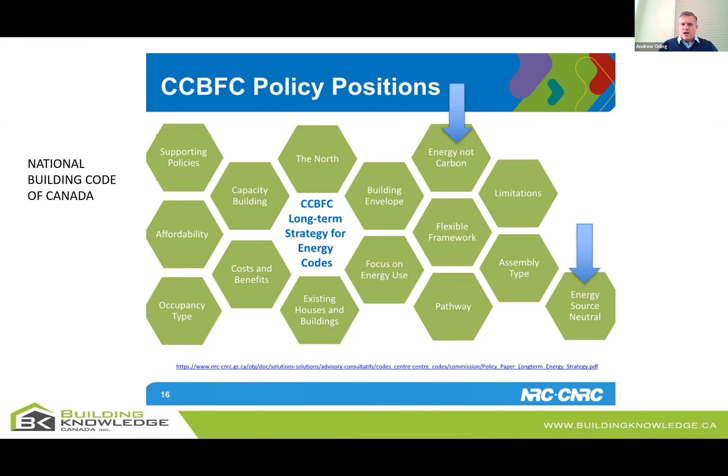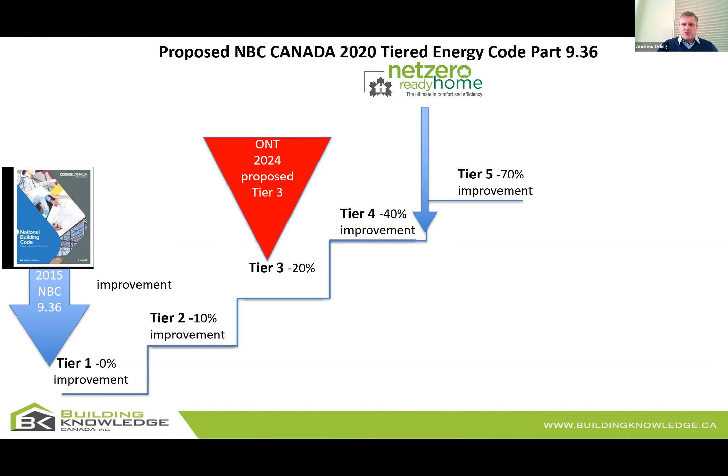So let's be really clear, because sometimes, in order to understand the development of a code, we have to understand the principal directions behind it. So this was for the 2020. Now, the question is, of course, with this tiered code, and of course, Ontario is sitting at about tier 3. We've heard, you know, Alberta might be tier 1 or tier 2. It depends on where the provinces want to land, but somewhere on these tiers. The real question is what impact does this energy code have on embodied carbon and on carbon in general? So that's sort of a question we need to ask ourselves.

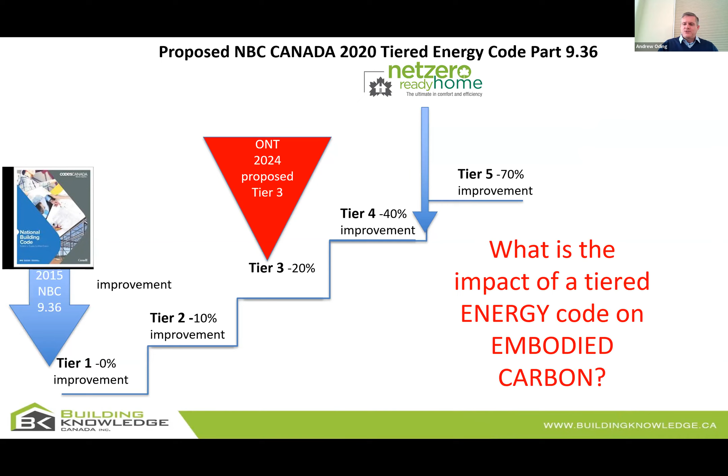One of the things that I think we do sort of know, and again, this is just our opinion from information we've gathered notionally, is the national building codes of 2020 and into 2025 will continue to deal with energy reduction only. When we get into 2025, you're going to see the release of alterations to existing homes and buildings around energy, but you might also see, who knows, a little bit of operational carbon.

In some of the future development code cycles, there is already some discussion and there's some work being done, I believe, on the policy side around resiliency. And really, the point we want to make with this slide is this really is lockstep with what we're seeing south of the border, and not just starting, but what we've seen for a number of years in other countries as well.

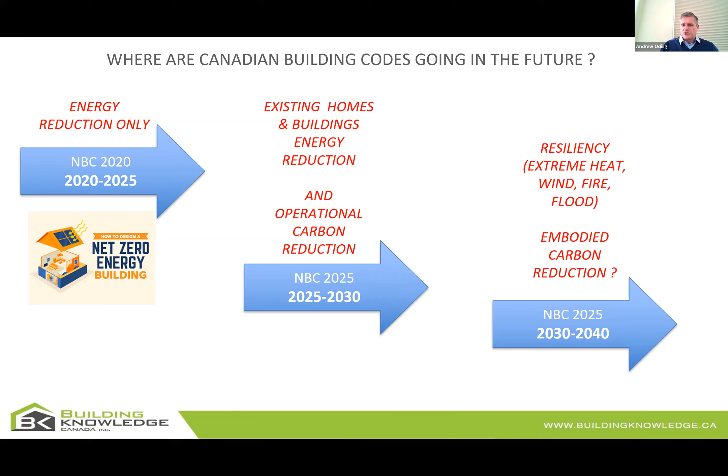It's interesting, if you do look south of the border, underway is the 2024 IECC, and that is the residential code for houses and small buildings. And what's fascinating about it is buried in that energy code, they do start to talk about lowering carbon. There is discussion in that code about using things like even renewables to offset a certain percentage of energy. So they're starting to move beyond that, and I think we'll start to see some similar trends here.

Of course, I'm going to show you a couple slides that have been a little bit informative. To some, they have been startling, but they have caused us to rethink our focus on energy and carbon. And of course, a lot of the work has been done by Chris Magwood and a number of others. This is an older slide, 2018 or so, from Architecture 2030, that pointed out very early that the concern isn't just energy, it's also carbon. That's really the big one when it comes to climate change.

And what they noted was that the operational carbon, we can sort of understand, that's the carbon that's emitted from the operation of the building and the home, but the carbon that's actually from the manufacturing side and the installation, wow, that's almost half the carbon output. So this is sort of important to understand.

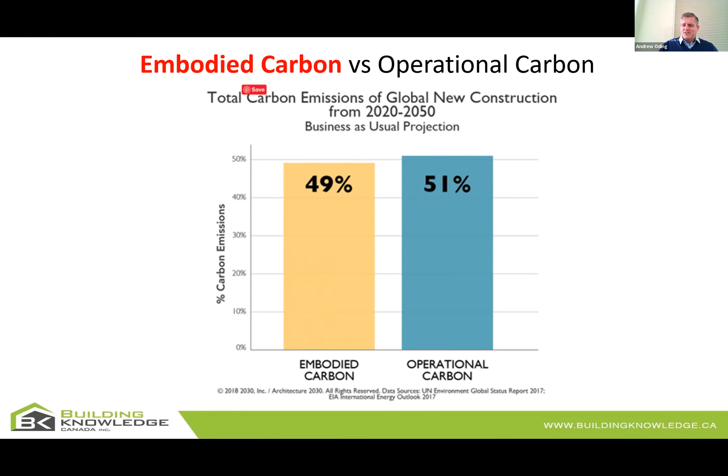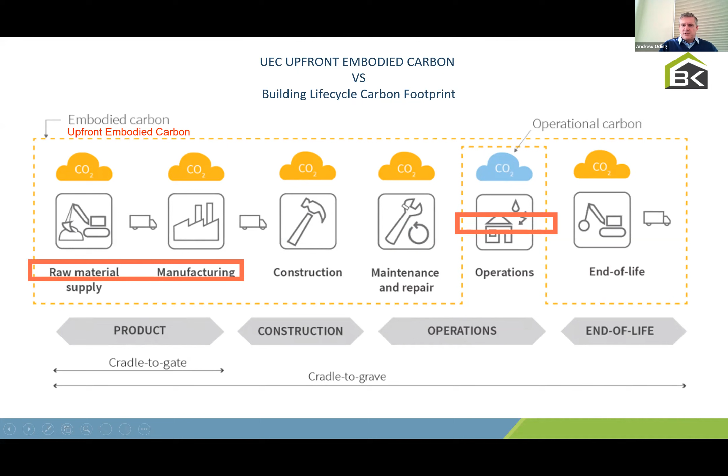So just to be really clear today, when we do use terms like embodied carbon or operational carbon, this is where they sit in the full life cycle assessment. We're not talking about all of the points of life cycle assessment for carbon emissions. We're talking about really two or three of the most important. So embodied carbon, or upfront embodied carbon, cradle to gate, is that raw material to manufacturing, something that you could get on an EPD that could be easily used in reference. And then of course, operational carbon that comes from the home.

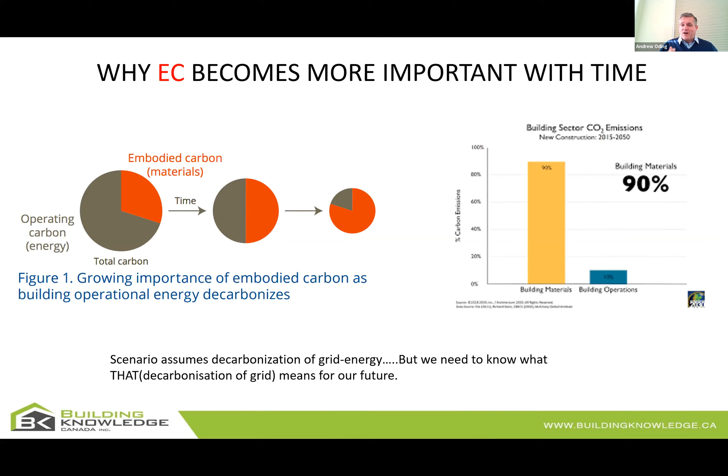One of the points that's made by Chris Magwood, Builders for Climate Action, and even Natural Resources Canada, is that as we reduce the energy use in the home in the tiered code and we reduce operating carbon, the embodied carbon becomes more and more important. And that's going to be as soon as 5 to 10 years out. It's going to become the biggest part of the pie for us to solve. So we need to start to develop tools.

Now, this was not a blanket statement. This was simply an observation, and this was based on some pretty dramatic assumptions, but it is good to keep it in our headlights.

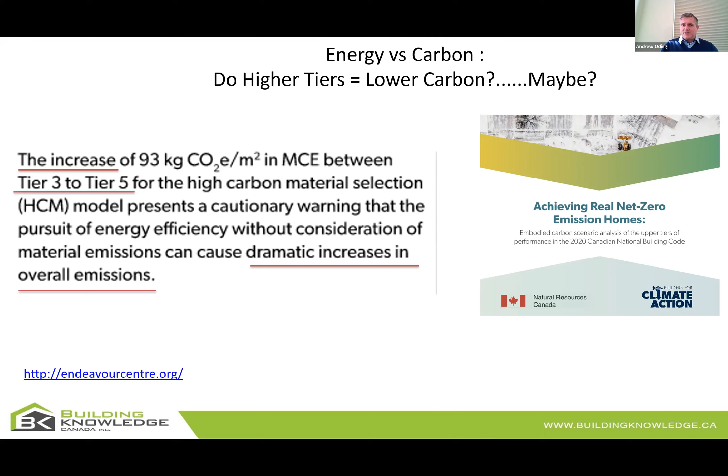The tool, I do want to bring this out. There's a training session coming up at EnerQuality over the next week or two, and it's training around the use of what's called the Material Carbon Emissions Tool. It's been developed by the LEAP team, Natural Resources Canada, the Endeavour Centre, Builders for Climate Action, and CanMet. All these folks are involved in developing this tool. And I wanted to give you a snapshot of what this tool is, because you're going to learn more about it in the future.

And the reason it's important, again, for our talk today is because we really are focusing in on that Part 9 low-rise residential stock in Canada. The Material Carbon Emissions Estimator tool, again, some of these tools are courtesy of the LEAP and NRCan and the team that's developing the MCE training. It is an Excel-based tool. It can be used by energy advisors and other professionals.

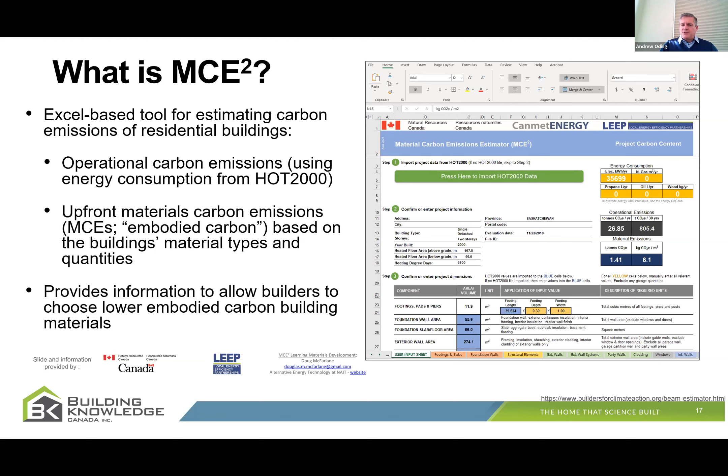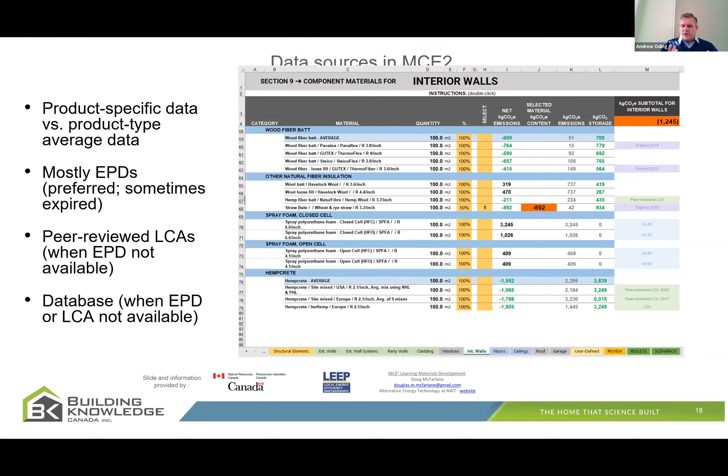It bolts onto the energy model and starts to give a sense of not only operational carbon, but embodied carbon. It applies everything from environmental product declarations from certain materials. In the lack of a material, it'll provide industry averages. So again, you can learn more about this in the course that will be at EnerQuality shortly. I did want to show you some of the results though that come out of this tool.

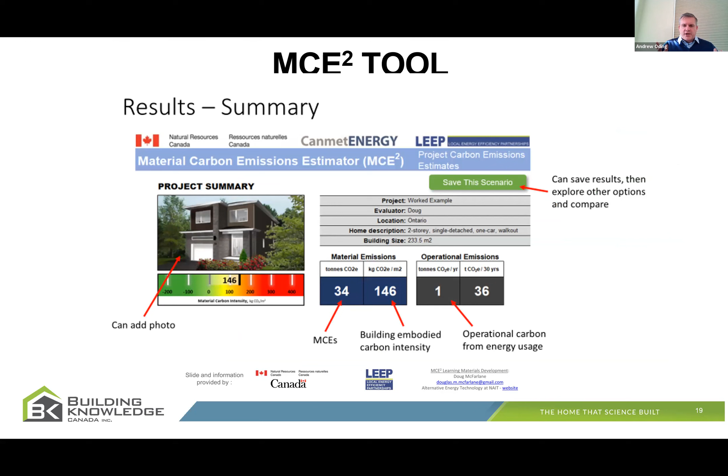We took a simple home actually that was built in Ontario, and we did an analysis. I want to show you quickly what it does. So here was the home, climate zone 6. So it's up on Georgian Bay, and we found out that using the MCE tool in HOT2000, this home had operational carbon over 30 years of about 100 tons. And the material carbon was about 55 to 60 tons of that. So the total carbon use intensity, if you will, over 30 years was a total of 157.

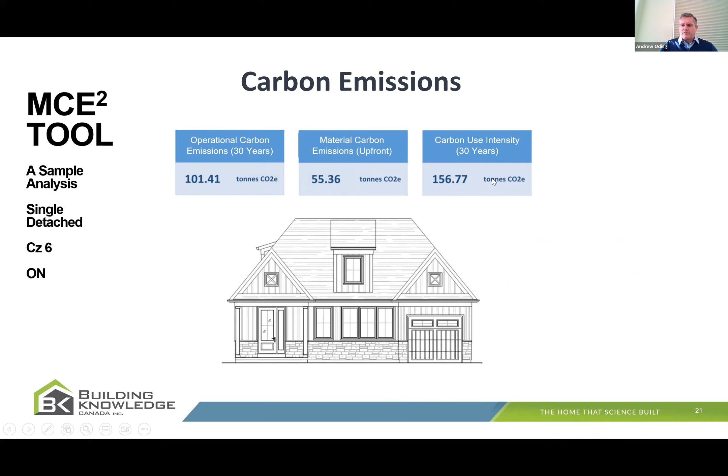What's interesting is with this tool, you can actually do a comparison. So on the left, this was the home as it was built. And we applied a little better insulation materials. In other words, we took a typical old traditional XPS insulation and applied the new low carbon NGX board. We applied things like an air source heat pump, a little bit of air tightness. We applied a different cladding, and we were able to take it to the results on the right and actually had an overall carbon emissions reduction of 52%.

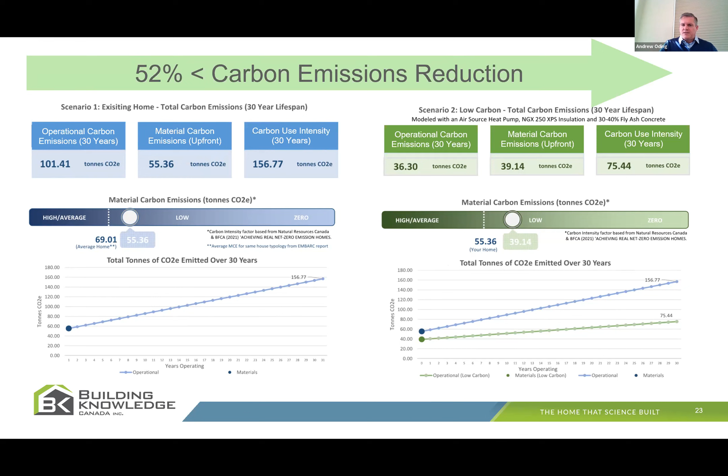And again, some of these could be considered fairly aggressive by some, but really these are sort of readily accessible solutions for homes today. So a big difference both on the embodied and upfront, and of course the long term as well. What were some of the big hitters on this house?

Well, if you could move to a carbon smart insulation, and again, very general term, what that means is maybe you'd move from an XPS to maybe a new XPS that has a better blowing agent. And again, we're seeing that with all types of foam boards. You could consider even fiber-based materials as well, cellulose or glass, either one. But again, we'd advise go back to EPDs, have a look at them.

Concrete, of course, everyone's on concrete. Like, we got to do something to concrete. And it's true. In this house anyways, if you change that concrete mixture a little bit, you could have the second biggest impact. And then the bottom one was they actually were using a fiber cement board siding on a lot of their homes. And we found that if you look at a little lower carbon fiber cement board siding, something that's newer to the market coming up from the manufacturers, they could then make a difference.

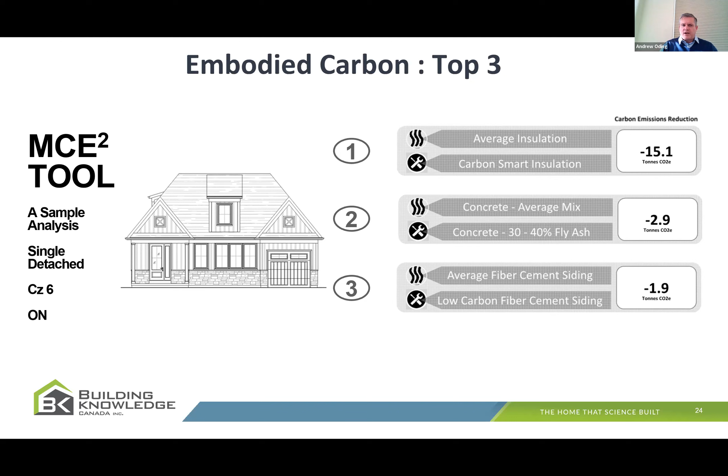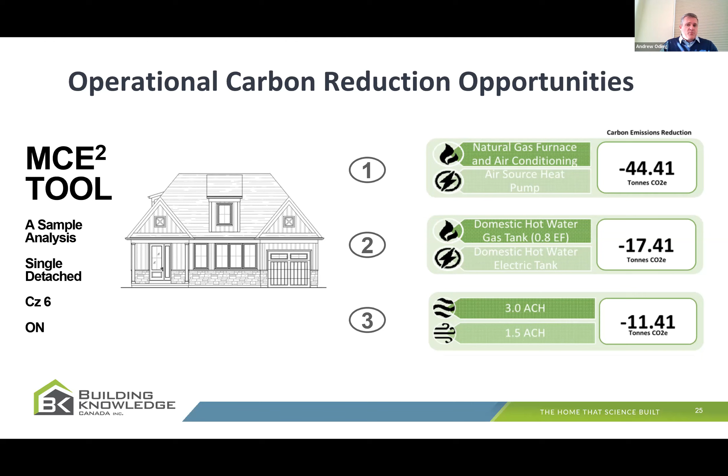Or a simple measure like air tightness, 11 tons, just because you made the home a little tighter. So the point we want to make here is that over the next couple of years, the exercise is going to be about benchmarking where we are today, and then what are the low-hanging fruit that we can do to make a reasonable improvement. And just by showing these simple measures, we could hit a 50% reduction in the total carbon emissions.

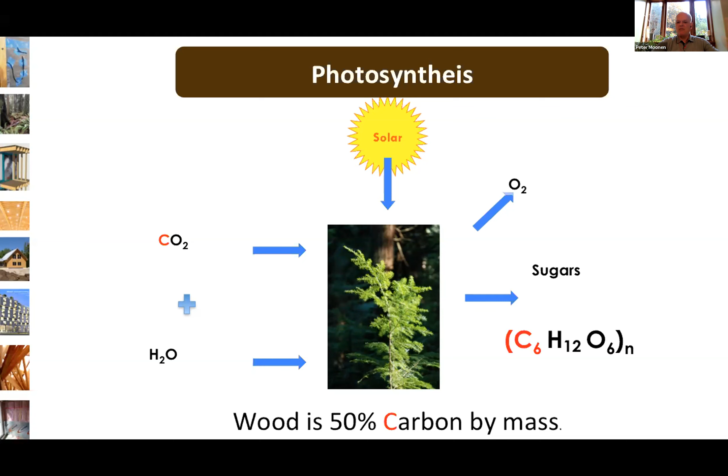A lot of discussions are around what we should do in the forest. Should we just leave it? Well, part of it's going to burn. Should we cut it down and plant fast growing trees? Natural Resources Canada has developed a carbon budget model for the Canadian forest sector. This includes all forests, not just forest that is harvested or managed. And you can have carbon reduction or carbon mitigation by harvesting less, longer lived wood products and better utilization, or a mix of all three.

What they found is that if we just focus on a single solution, we're not going to optimize what we're trying to achieve. If you're interested, it's a parametric model developed by Dr. Werner Kurtz, who has been on the IPCC for many years. He's recognized as a leader on land-based emissions, which includes agriculture. So we have to look at forest management in multiple ways, because how we manage this forest is going to be different than that forest.

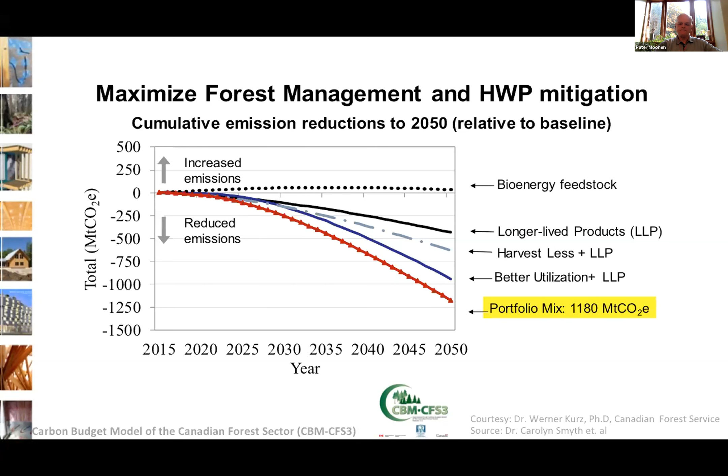Where I live, I have a forest that's about 130 years of age, and it has an average annual uptake of about 35 metric tons of CO2 equivalent every year. Older forests may have more mass of carbon, but it will be in much fewer trees, and that forest will generally be in a stasis where it's not absorbing any more carbon because the dying trees are also emitting carbon.

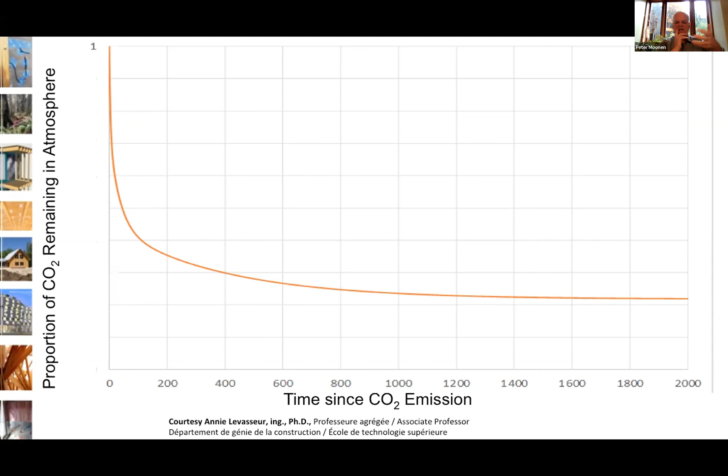Typically, when you're dealing with wood, you're dealing with what's called a biogenic product. It comes from nature and it will go back to nature. In 2 years, 200 years, 2,000 years, it will go back to nature. But that's a cyclical event using atmospheric carbon versus fossil carbon, which was atmospheric carbon 250 million years ago and is locked up. So with this half-life, what we're doing is we're delaying the emission of the CO2 by storing it in a wood product. And that radiative forcing is what we're trying to avoid.

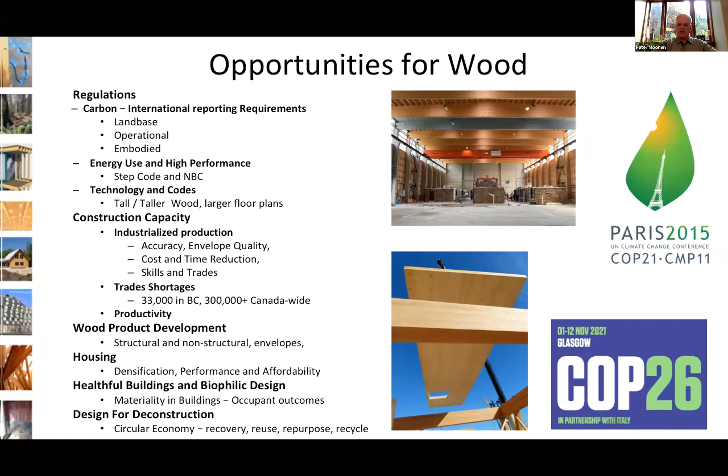And when you look at what's happening around the world in the construction sector, you've got regulations, international regulations on carbon, whether it's land-based or operational or embodied. You've got energy use and performance guidelines. We have changes in technology. The construction sector is facing all sorts of opportunities and issues. I'm going to go through a few of these with an eye to how wood can contribute to what this issue has created.

So we talked about the IPCC and Werner Kurtz and the carbon modeling, carbon budget modeling. This is the forest I live beside in British Columbia. And the emissions from the land base are now required to be reported to the IPCC. And that includes agricultural. It also includes all of the emissions that come from forest management and from the forest land base itself, whether it's from fire, bugs, or harvesting. So those are regulations that we have to report.

Those are agreements. But the forest will sometimes release more carbon or it will store more carbon, depending on the fire season for the most part. If we have ways of reducing or capturing that carbon, we're actually contributing to mitigation.

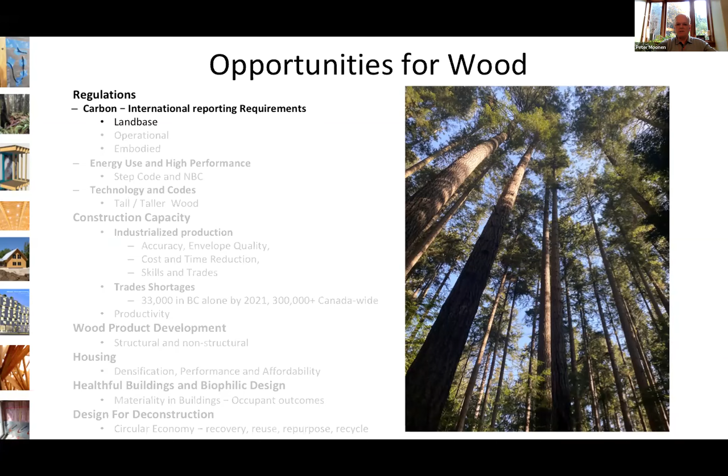I'm glad you had some of those photos earlier and some of the discussions from Chris Magwood, because embodied carbon is important. This is a life cycle analysis that was done for a building in Australia. And as you'll notice, the embodied carbon is 35% over the life of the building. 23% is heating and air conditioning, which is the part that's regulated by our codes. So we put all of this effort into operational performance, but we're really only addressing about a quarter of the operational energy, because no one tells anybody how much hot water to use or how much refrigeration to use.

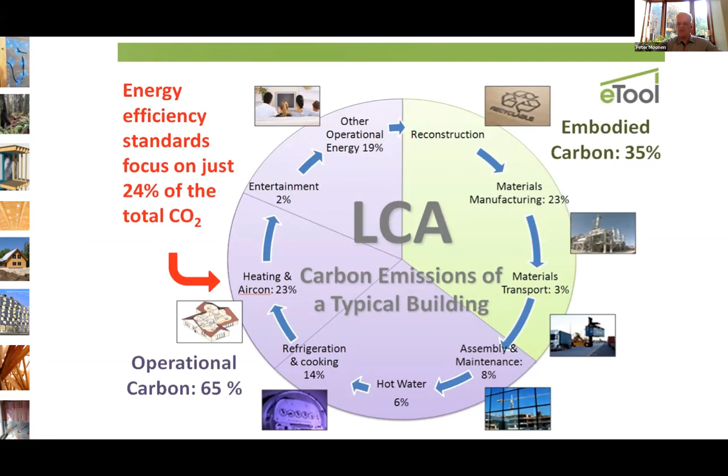So in this LCA, the embodied emissions of a regular building were 50% higher than the carbon emissions associated with that which is regulated. Wow. So Andrew, you mentioned that we're getting into carbon regulation. This may change. But we have to look. This is as it is now. So I talked about this forest product substitution, but didn't delete the slide.

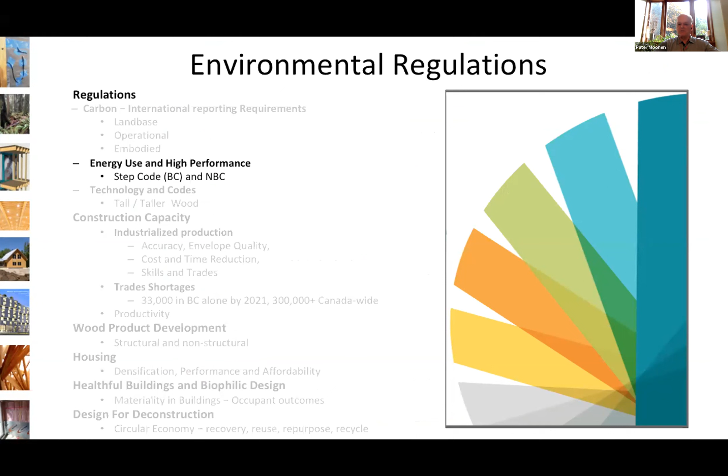So energy use and high performance. I don't think anyone's thinking that we're not going to have rigorous energy codes. They're not going to get simpler. These are opportunities for wood, partly because of wood's thermal capability, but also because of some of the technology that is able to be used.

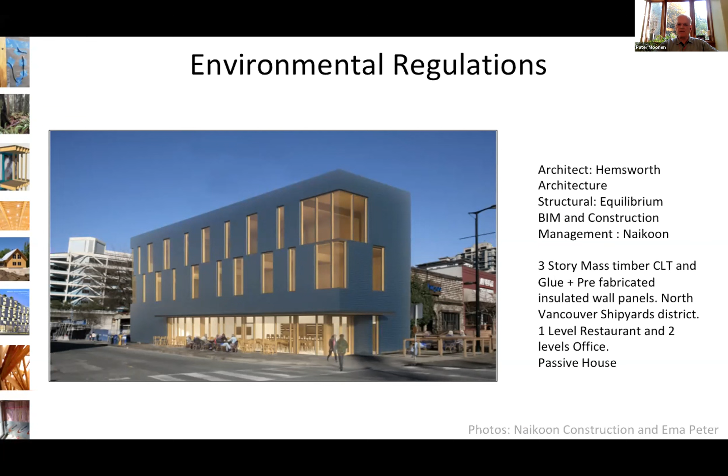Peter, it's interesting. This is Naikoon Contracting. That's Joe Galushan's team. I know. I know Joe well. Yeah. And so for a lot of the attendees, Joe has been part of the CHBA Net Zero Council for years. Yeah. Phenomenal builder member. That's great. No, that's very cool.

Thanks for that. So the thing about this one that drew my attention was not that it was passive house, not that it was mass timber, not that it was heavy timber, not that it has no parking, not that it has a CLT fire separation. It's because it has all of them in a building that made economic sense. Wow. So we can do this, and we don't have to say, oh gosh, it's going to be 30% more expensive. That's not true. And Joe has figured it out. He's done several buildings, and it's always a treat to get on some of his sites.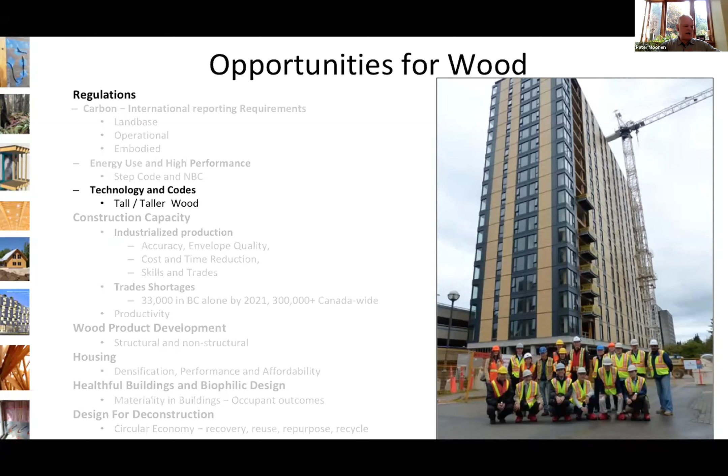And Andrew, you talked about Joe. They built that building virtually several times beforehand to figure out the best way. Yeah. They used, I think it was, CAD Makers' design. Every component was installed virtually. So another area where we have to focus is construction capacity. I don't think any builder is saying, oh yeah, I got lots of trades. No problem, I can get them anytime I want.

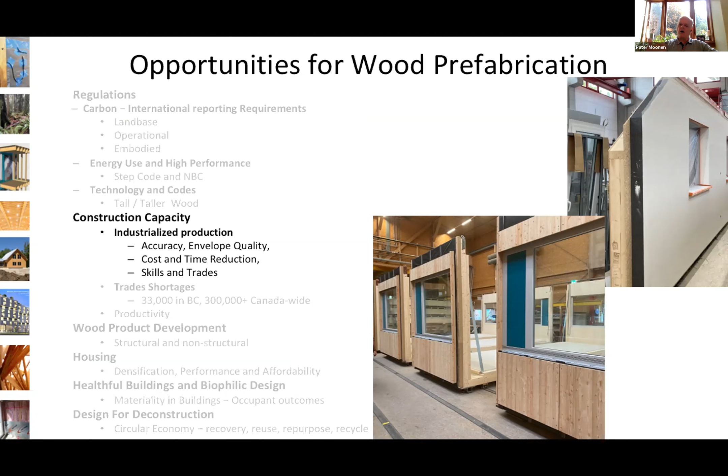But there's another aspect to industrialized production, and that's the accuracy, the consistency. The pictures here are from some companies that we saw in Europe last spring that fabricate modules, they fabricate panels, they build component sections or bathroom pods, that kind of thing. That industrialized production reduces the waste of materials, which always has a carbon impact, reduces the time, and consolidates where you have your skills and trades. So that's an opportunity for wood, and it's an opportunity for carbon, because this kind of construction provides a higher operational performance and a lower embodied impact because of the lack of waste.

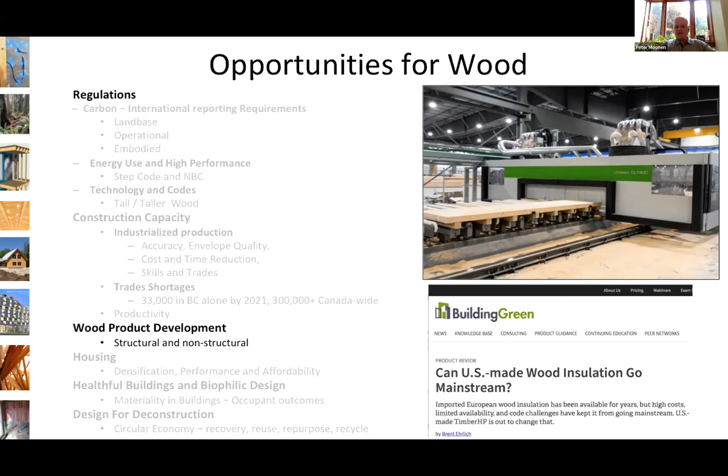Wood product development. There was an article just earlier this week that I read: Can US-made wood insulation go mainstream? It's a product that's been around in Europe for about 30 years. We don't make it in Canada yet. And Chris and I have talked about this, it has a very low embodied impact, and it has very, very good performance. It's about the same as XPS. But it's renewable, it's recyclable, it's reusable, unlike a lot of insulation, because it's screwed in place, not glued. And it's made with a residual material.

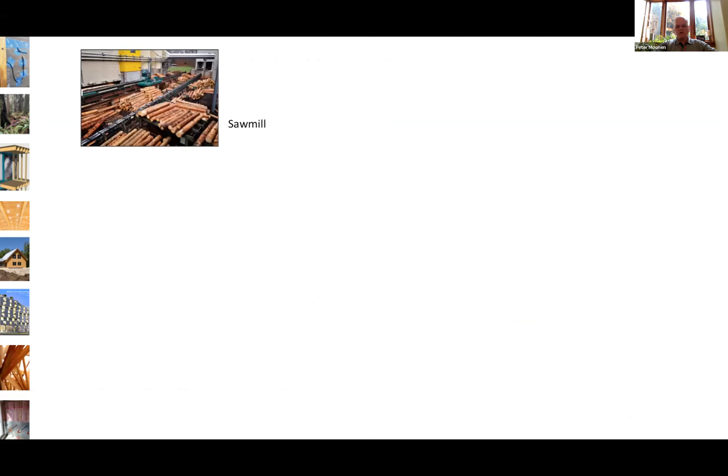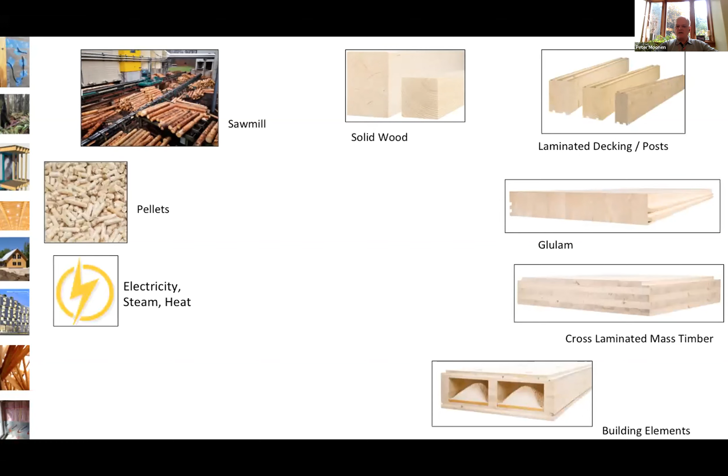There's a sawmill in Europe that burnt down in '74. The widow restored it. She makes lumber. She makes solid wood products. They make laminated decking and posts. They make glulam, cross-laminated timber, building components, pellets, energy, steam, refined fiber, and wood fiber insulation, all from this small 20-acre site that used to be the family farm in a small town in Germany. Wow. We can do that here.

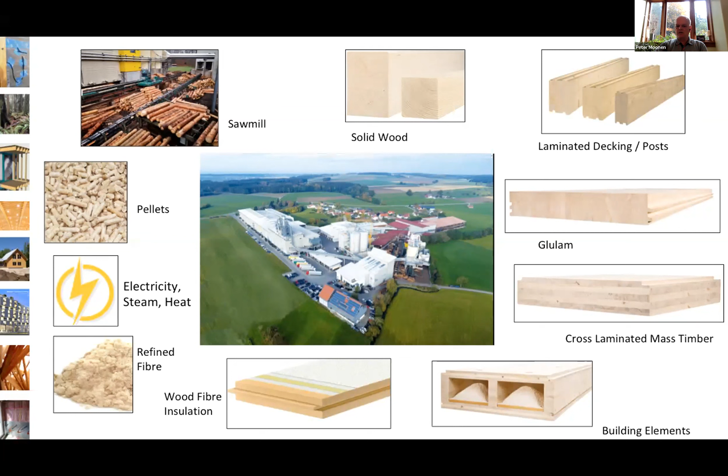We have to reconsider how we do things, but this is the kind of operational efficiency. At the end of the day, nothing gets wasted that goes into that mill. It goes in as logs, comes out as ash or a product. And I think they probably sell the ash. Mm-hmm. So this is optimizing the carbon that comes from our forests. And a lot of these are going into long-lived wood products, other than the pellets.

The other thing, I don't think there's a city in the country or in the world that isn't facing densification issues. And in Canada, at least in British Columbia and across our country, you can't just densify, you've also got to have performance. While at the same time, we're faced with who the heck can afford to live in these cities? Mhm. So how are we going to do that?

It's going to go back to things like addressing the productivity of our construction sector, using cost-effective materials that enable the performance of the building to improve and reduce the impact. And that's where wood can play a role.

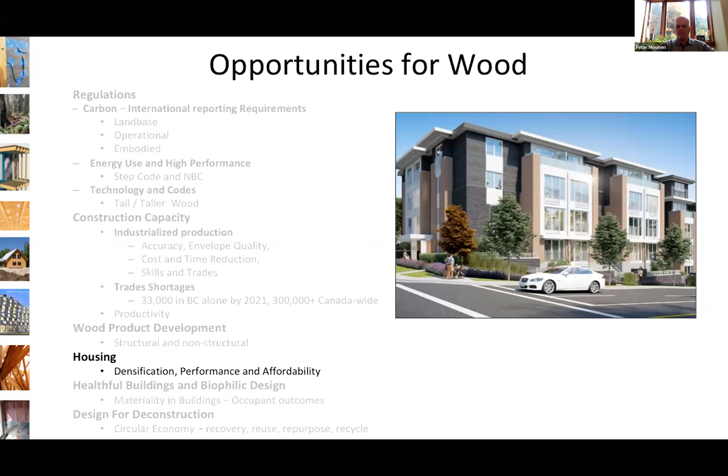The other things, some of the things which some of you as builders may have come across, is the biophilic aspect of buildings and the health of the buildings on the occupants. If you don't know Tye Farrow, please go to his website. It's called causehealth.org. I'll put it in the chat later. And he has just finished a master's of neuroscience in architecture. He's looking at the impact of the buildings on us. And he's examining things like acoustics, temperature, moisture, the whole, and what we see, whether it's conscious or subconscious.

So wood, other natural materials like stone, water, plants, sunlight, those have a positive effect by reducing our stress levels. And whether we're aware of it or not, we have stress wherever we are. There's good stress and there's bad stress. And if you think of a building, whether it's healthy or not, as sort of like driving a car uphill, but the car has no brakes. You're either going forward or you're going backward because there's no stasis. Buildings impact us, and we have to make them so that they impact us for the better.

Wood has been shown to reduce the stress level in both the sympathetic and parasympathetic nervous system. That could be a whole topic on its own, Peter? Yeah, it can. Yeah, it's a lot. We did a workshop on healthy buildings last spring.

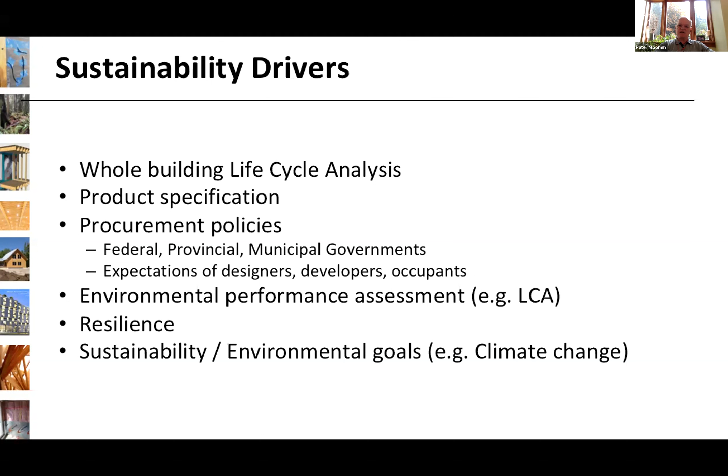Andrew, you talked about resilience, and everybody has sustainability goals. So these are some of the things that are driving our sector. And above all, materials matter and carbon matters. And as I said, there's procurement policies which are coming into place. For those of you who may not have done whole building life cycle analysis, I'd urge you to find someone who's familiar with that, whether that's in your design team, whether it's on staff, but pay attention to that because it not only helps you reduce environmental impact, it makes you more efficient. Right. The EPDs were started to reduce the impact, and that makes people more efficient.

And don't be afraid to collaborate. I know CHBA has lots of collaboration opportunities through some of the sessions they have, but we need to be cohesive on our objectives and have some common tools. That's right. So one of the tools that we're working on is a project of the National Research Council called Low Carbon Assets for Life Cycle Assessment. We call it the LCA squared. And it's part of the government greening their procurement strategy. And we are involved in gathering information from all of the producers of various wood products. So we're focusing on plywood, OSB, lumber, I-joists, and plate trusses.

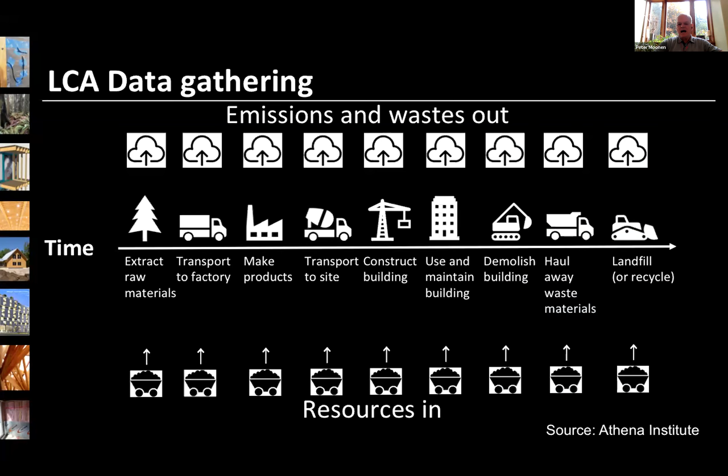You had a version of this drawing, Andrew. There's certain areas where a manufacturer has a role to play. So in this case, the Forest Products Association of Canada, that's a member-driven organization, they're responsible for the forest aspects, the transport to factory, and for the manufacture of the primary products. The Canadian Wood Council and the Woodworks program get involved in assisting designers and contractors to understand the appropriate use of wood. So we play in this area.

But at the end of the day, after the building has been torn down or removed in some way, what happens in this area? Landfill, the product stewardship. So it's an area that we are going to be doing some research on, not so much to reuse those products, because landfill occurs after all reuse, but to say, what is the impact of burning or landfilling an I-joist that has 3 resins? So we're going to be gathering information like that over time.

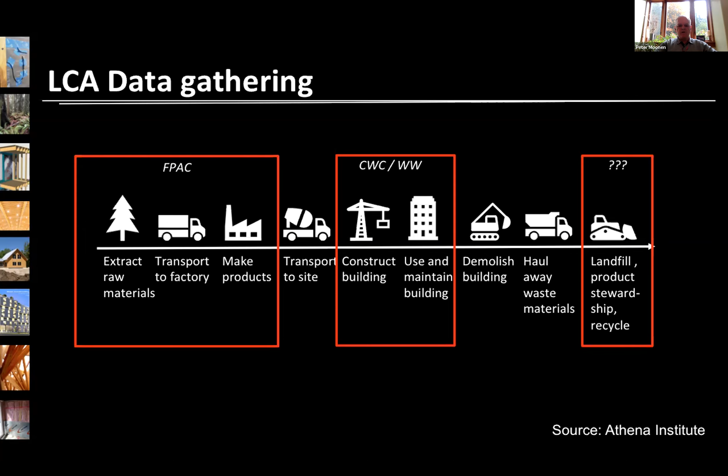But there is a really important role in designing buildings that don't have to be landfilled, that can be reused. And when I say reused, no one's going to take CLT and turn it back into a 2x6. How do we recapture the function? That's the circular economy. So when I get back to this slide here, and I say, if I was to invent this material, I'd be rich.

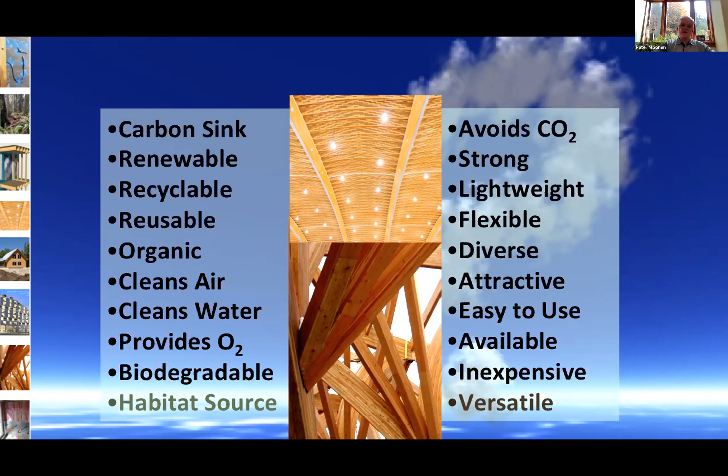But the question that we have to ask, and in the context of that, there is no perfect material. But if we're going to build, why should we use wood? So you think about all these attributes, all of which are important, and many of which we strive for in our designs. So perhaps the question shouldn't be, why should I build with wood? But if I'm not going to build with wood, what am I going to use that performs the same structural and comfort and aesthetic function and has as low a carbon footprint, where applicable, as wood?

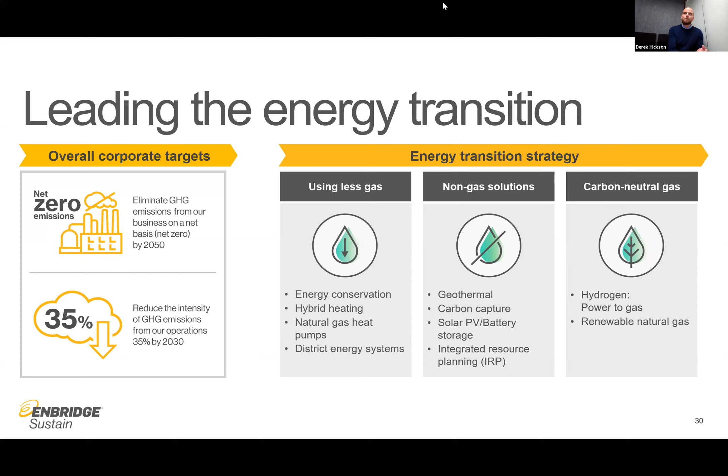So coming from the builder world, I can attest to these challenges faced by customers and builders. Obviously, as Andy's slide earlier alluded to, the codes are getting more and more stringent. Municipalities are taking on a more active role in specifying what targets we should be hitting, and customers are demanding more from their homes as well.

The challenges in just immediately going to a net zero future is, we have a high cost to adopt some of these technologies. It's certainly more expensive than conventional from a capital cost perspective. And we'll talk about the operating costs in a second. Builders and homeowners don't necessarily have the time to research the best choices, nor do they have the technical expertise. And then the last big piece is the technologies that are coming out are becoming a bit more sophisticated than a layperson may be comfortable with putting in their home.

So, I'll talk more specifically about the technologies we're looking at, but obvious items are things like geothermal, where the operations of them are paramount. Hybrid heating, where to really capture the benefits from them, you need some smart controls, and solar PV and those kind of things, where people's comfort with having them integrated in their house might not be there yet. And if you want to go to the next slide.

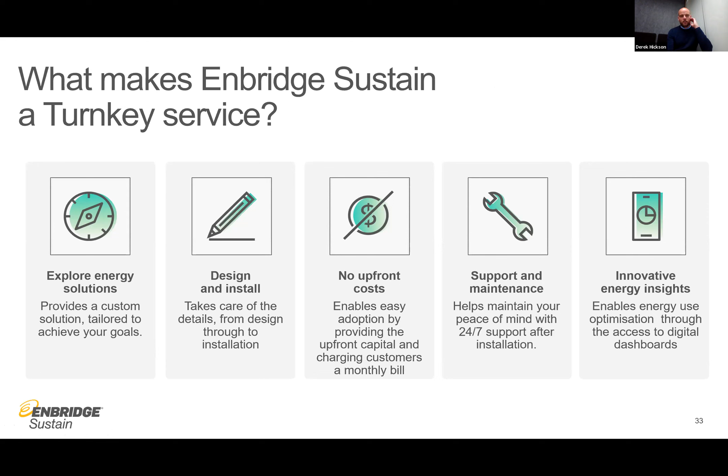Enbridge on our side, we would design the systems, present them to you, of course, and install them. All the design fees and the installation fees would be borne by us. We would turn that into a low monthly fee for the customer, again ensuring that the goals for the customer are met. And then, because we would own and maintain the equipment, we would also provide ongoing support and maintenance for the customers. And, I'll talk about this a little bit later, but we're actively developing an interface for the customers to see their energy insights, to see their savings, to see how their systems are operating, and so forth. And if you want to go to the next slide.

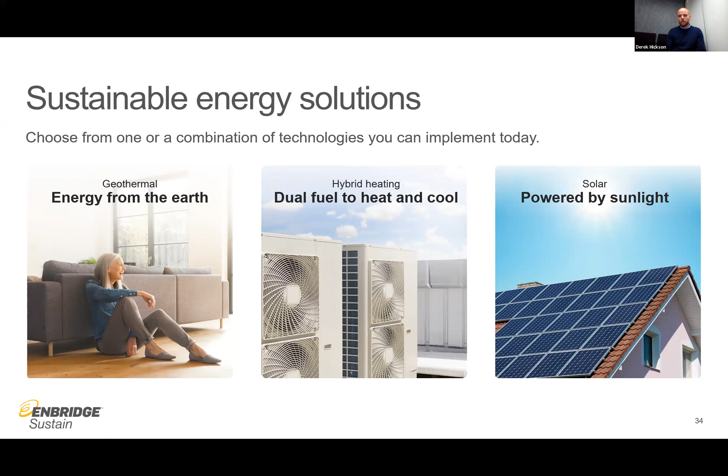So as I mentioned earlier, we're not fully in a box yet. We will entertain this structure for any low carbon technology that falls in that sweet spot of higher capital cost with more sophisticated maintenance requirements. But the three we've started with that are turnkey at this point are geothermal, hybrid heating, and solar power. And I'll talk a little bit about each of these in the next few slides. I won't spend too much time here because I don't have a ton of time, but if you want to just go to geothermal.

So for anyone who's not familiar with geothermal, this is literally meaning heat from the earth, where we would install a borehole that connects to a ground source heat pump that would provide heat for your house and potentially hot water. Of course, it's long-term savings, very close to zero carbon emissions compared with a traditional gas system, reliable, resilient, and up to 400% efficient.

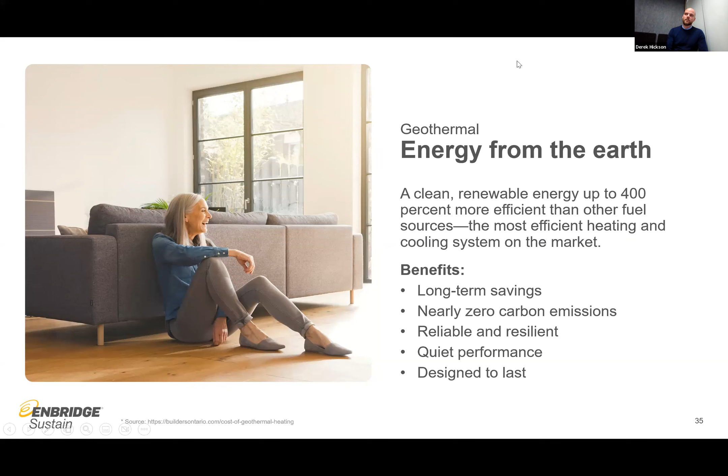This one in particular, in terms of illustrating the energy as a service model that we're trying to go for, is the one that has the closest comparison to the gas model that we currently operate under. As Enbridge Gas, we bury assets in the ground and we finance them over a long term. This would be the same situation. So we would put in the infrastructure and finance it over a 40-year term to get the cost of that spread out long enough so that the savings are paying for themselves. And you can skip two forward.

I won't, because I don't want to spend too much time on the technologies in particular. So hybrid heating or dual fuel, it's exactly what it sounds like. Air source heat pumps have certainly come a long way, but we see in a lot of situations that their efficiencies drop off in colder weather.

So by employing a dual system, you can take advantage of the high efficiency settings of a hybrid heating system when the weather's a bit warmer out, but then use gas for peaking or for hot water. It ends up being, with smart controls, the most flexible in terms of how you deploy it, especially in terms of whether you're delivering on your carbon savings or your cost savings. We're investing quite a bit into the smart controls themselves to be able to dial that in for the customers depending on their needs.

And this solution is good obviously for the new construction market, but we have a whole host of older homes in the province, 3.7 million, where the demands currently, without deep energy retrofits, something like a cold climate air source heat pump won't tackle entirely. And then solar, Andy, if you move to the next slide.

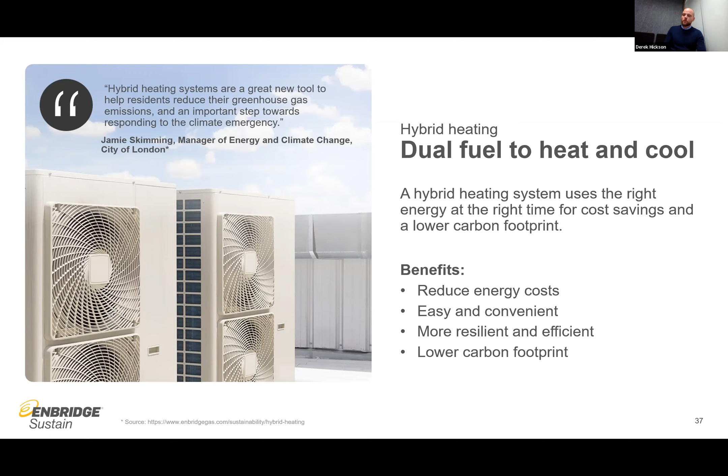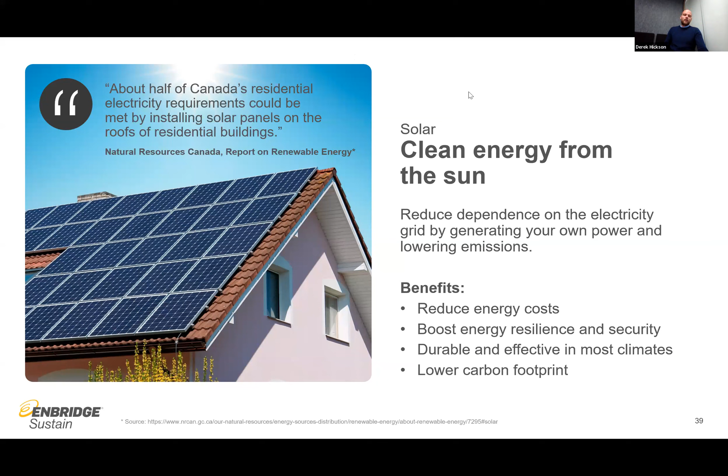Solar probably needs the least introduction. Solar panels on the roof, and in Ontario at least, we have a net metering program. So you connect your system directly to the grid. Again, we would do the design, build, install, and service and operation of that over the long term. So that's the technology side. I think we can probably skip this too, Andy, how we work with you. The benefits, I don't know if I ended with benefits.

Okay, so tying all of these three together and any additional solution that we put on, we're investing a lot in energy monitoring and reporting. We talk about this a lot within Enbridge, but at the end of the day, we're in the customer business. We have 3.7 million customers in Ontario. That's the heart of what we do. So when we were putting this together, one of the key differentiators that we're looking for is making this a terrific customer experience.

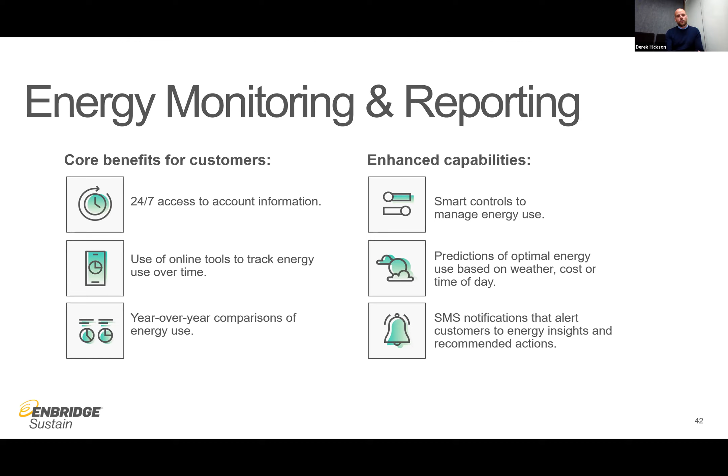So obviously entering into longer term agreements, a certain degree of transparency is required. And we're developing a portal both for builders and for end users, where they will be able to access their account, track their consumption, get insights into how their home is performing this year versus last year, and really understand the value that we're bringing to the table in terms of a utility energy as a service model. Very cool. You want to go to the next one, Andy? Perfect. I thought I had another slide just reiterating the benefits, so maybe I'll just do this quickly.

Again, at every conference I've been to for about 15 years, the question is, well, who's going to pay for this? And it's because Tim and I have been at every single conference. Yeah. Well, who's going to pay for this? What constitutes the builder's responsibility versus potentially the utility's responsibility? And this is the gap we're trying to bridge here, which is to enter that utility model of longer term financing applied to a more retail space.

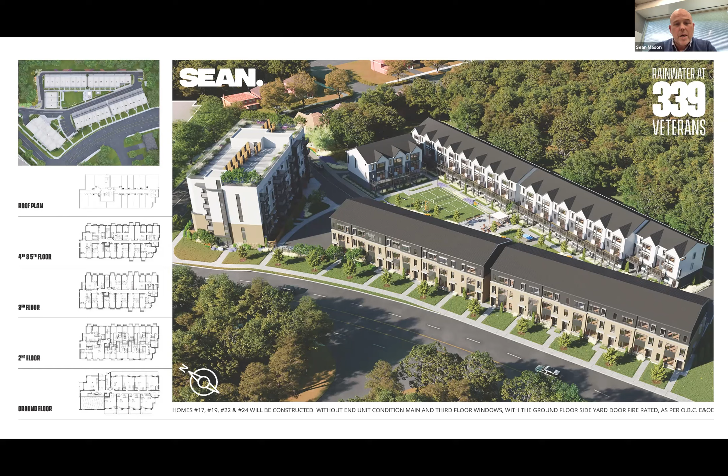Okay, so what you'll see in the middle there, and you'll see it in later slides, is the Central Parkette. We designed this during COVID, things that people would want during COVID. And so there's a pickleball court there, there's an outdoor workout area, there is a meeting area. And then if you can go to the next slide, this is what it looks like today in Barrie, because the snow just started in Ontario.